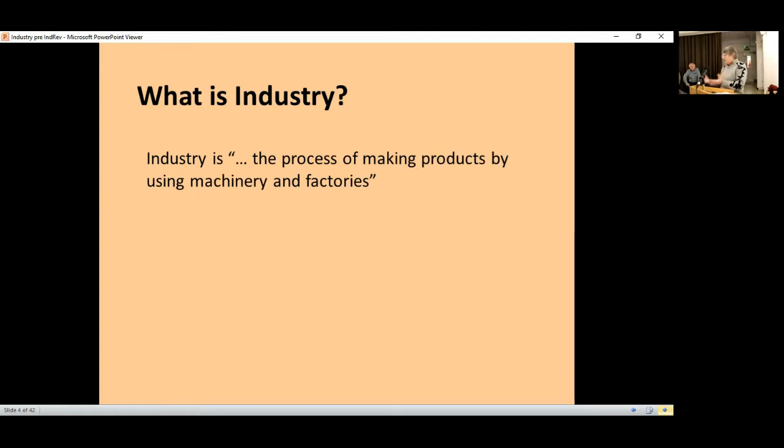So having dealt with the Industrial Revolution, I'm now going to talk to you a little bit about what do we mean by industry. It's using machinery, it's working on a large scale, maybe in a large building. You're not just using manpower, you've got other sources of power. On the scale of working, you're producing lots of identical products. You maybe got many workers there, all doing different stages in a chain of production.

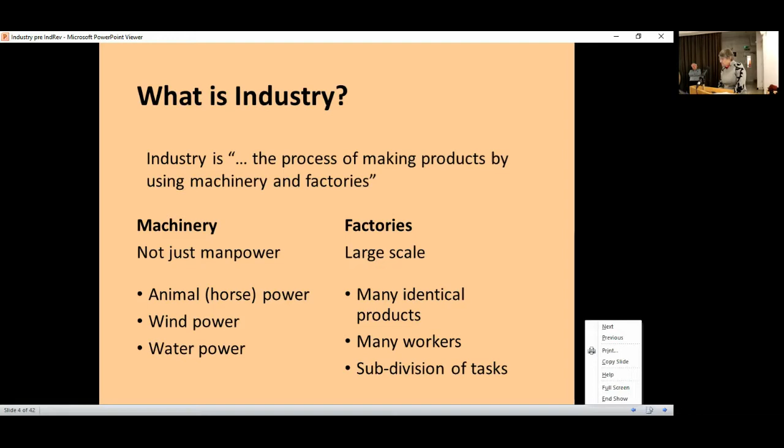And what I'm going to be showing you is really evidence, mostly archaeological evidence, for this happening and starting to happen way back in the Middle Ages rather than at the beginning of the Industrial Revolution. So the sources of evidence I shall be presenting to you are mainly archaeological. They're evidence from excavations of features, the finds that come out of the ground. So you've got evidence about workshops, about furnaces and hearths, raw materials and tools that were being used.

And you'll often find a lot of the waste products, which you can then investigate using scientific techniques to identify what process or processes were being carried on. There are medieval and Renaissance technical treatises, luckily, from my point of view, available in modern translations, translated by people who understand the technology, not just by linguists. And that gives us an extra layer of information we can use to help interpret the archaeological finds. There are some other documents I've listed here, things like wills and guild records, but I've not made much use of those.

This is a very sensitive thing. Go back.

Right, I'm starting off with ironworking, the bloomery process, which is the medieval and prehistoric way of making iron, very small scale.

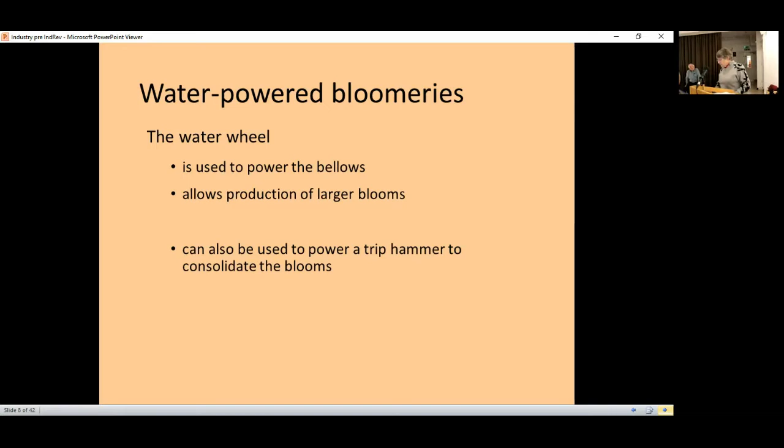A development of the medieval period here, you've got water power coming into play. You can use it to power the bellows, and it allows you to produce larger blooms. You've got a more constant draft. You're increasing the scale of the operation, and the water power, of course, can also drive a trip hammer to consolidate these blooms. And this is old data from back in the 60s that Ronnie Tylecote put together, showing how the sizes of iron blooms increased with time.

You can see along the bottom, you're starting off prehistory, and then you've got a sort of plateau through most of the medieval period. And then suddenly, towards the end, he's detecting much larger blooms being made in the 15th and early 16th century. And this is when water power comes into play in a major sort of way.

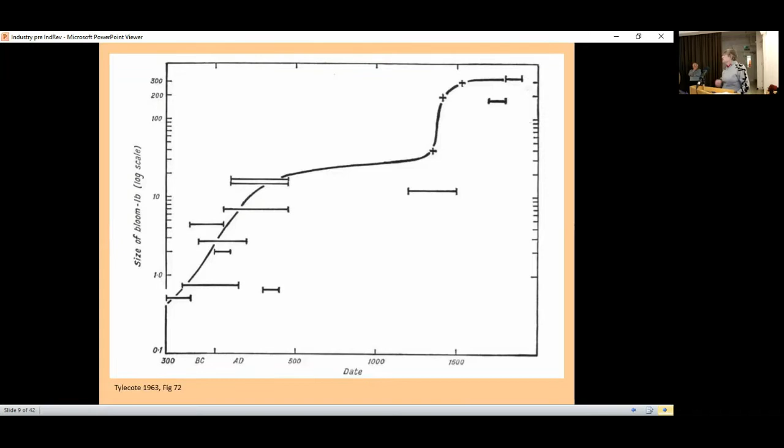Yes, I have a wheel of death here.

Right, so if you've got water power, this is a reconstruction drawing based on archaeological findings at Bordesley Abbey, which is in the West Midlands. And it's an early smithy. It's not water power here being applied to a furnace. It's for the smithy. So once you've got your bloom, you take it out of the furnace, you've then got to consolidate this iron sponge. And so having a hammer, having a large fire, water-powered bellows makes it much easier. You can work on a much larger scale than you otherwise could do.

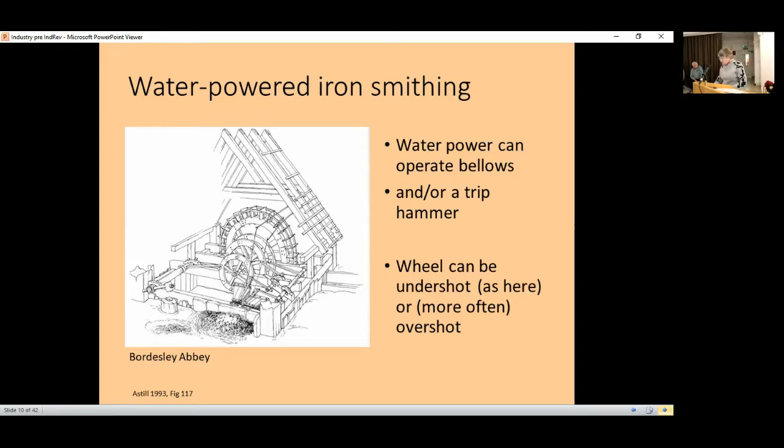It started in the end of the 15th century. This is, as I say, 16th century, and it finished in the early 17th century, but the waterworks went on to blow a blast furnace, which was nearby, built at the end of the 17th century. So this sort of reuse of infrastructure, again, is something that comes in: having built something on an industrial scale, I would argue, it then continues on in use.

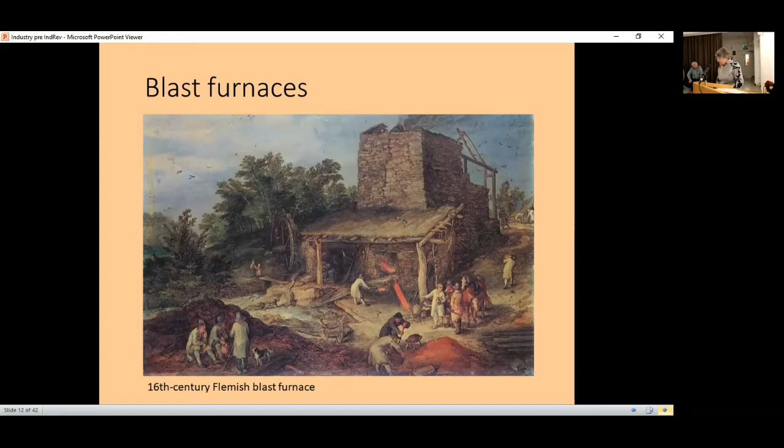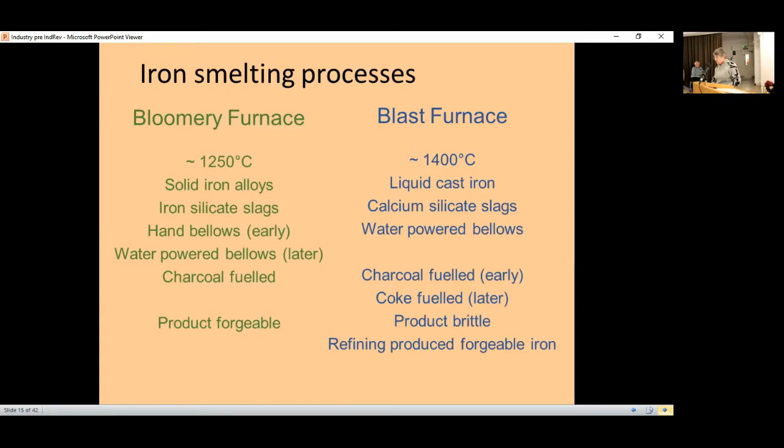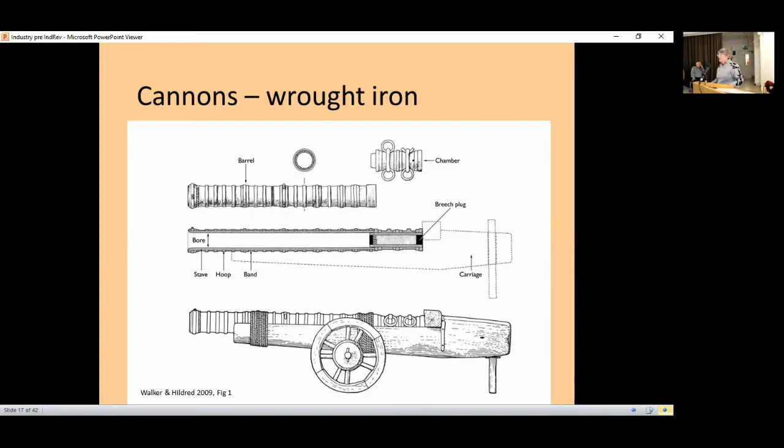And this was the way that you could make a workable piece to fire, but without casting it all in one. And in the middle of the 16th century, you begin to get cast cannon. Seemed to be an English speciality to begin with. The Weald was the place where most of them were made, and really nobody else was having a go at it until the 17th century.

And these pictures show you the cannon from Pippingford, excavation by David Crossley, and it's still got its casting head on. You can see it up at the top end of the cannon. It's never been cleaned up, it's never been used. Why? Because they would have tapped it and found that there were voids, the metal hadn't run and totally filled the mold, and so it was useless. They could have melted it down again, reused the metal, but they didn't do so.

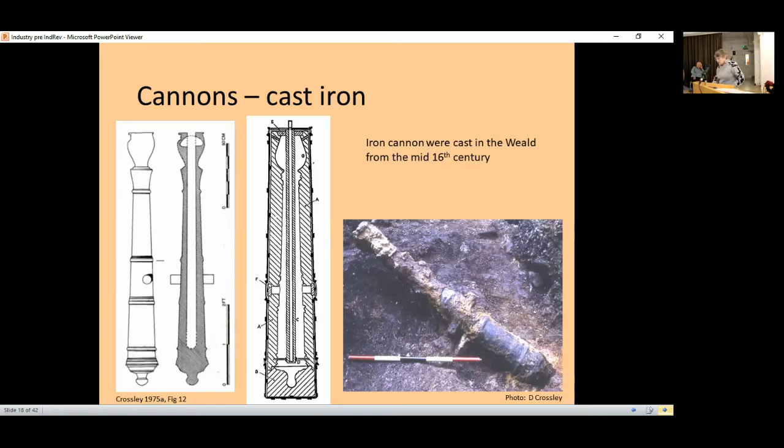So we've got all the stages. We know they were doing it. This isn't just one man and his dog in a smithy having a go. This is iron casting, large scale. And I think it's the beginnings of the technology that then goes on to produce large iron cauldrons and things like that in following centuries.

If we leave iron behind, I've said quite enough about that. Look at lead smelting, and that again is something where you've got changing technologies. You start off in the medieval period with a bole. It's basically a bonfire on a hillside. It's blown by the natural wind. You'll put it somewhere that it'll get a good draft, and you're burning wood, you're reducing the lead, and you're ending up with lead metal, but it's very wasteful. A lot of the metal gets oxidized, you don't retrieve it as metal.

And so you get the ore hearth coming in, a different process, in something like the 16th century. Here you've got bellows blown, either hand bellows or later on water powered. You've got different fuels being used. And it's a rather more efficient process. And then finally in the 17th century, you've got the cupola, reverberatory furnace, and you're getting a different technology completely.

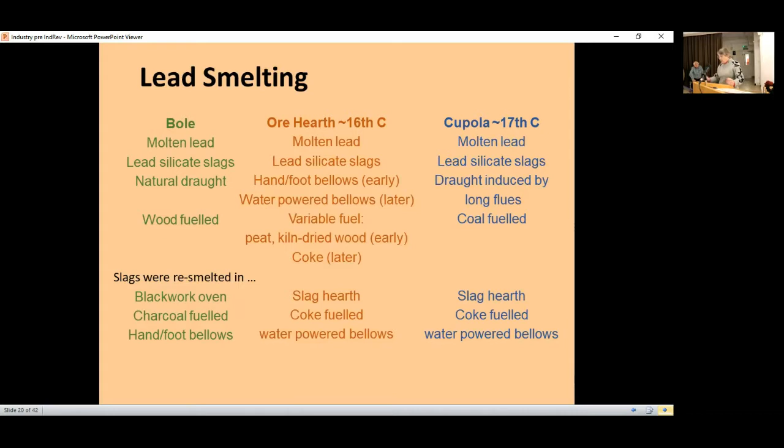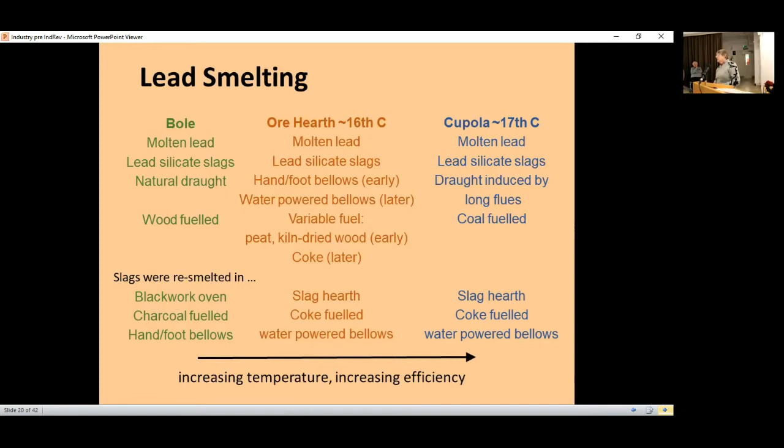And why all these changes? You've got increasing temperatures, but you've got increasing efficiency. You're getting more of the lead that's in the ore out as usable metal. And so it's an economic driver for changing the technology, because you're going to get more of the lead that's in the ore out as usable metal at the end.

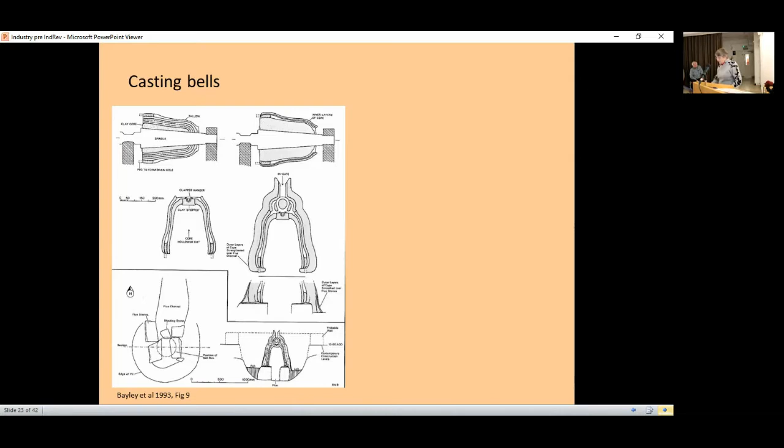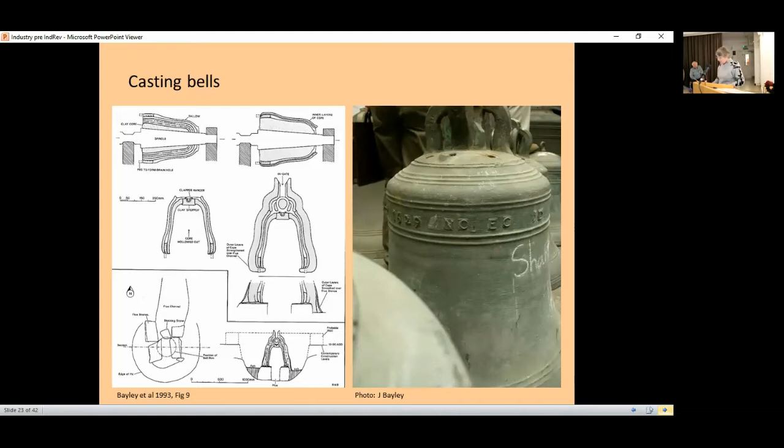If you look at bigger objects, things like bells, this is another case where the technology really doesn't change in centuries. And in fact, if you'd gone and looked at what the Whitechapel Bell Foundry was doing only a few years ago before it closed down, you'd have seen a lot of similarities between this, which is a 10th century bell from Gloucester. Here's a 17th century bell, its shape is somewhat different, but the way it was made and cast is just the same.

And this is how you would have done it. You make your core, you make your cope, the outer part of the mold, you assemble them, bury it in the ground in the bell pit, and then you build a furnace, melt the metal and run it in. And that technology hasn't changed in over 1,000 years. You're making large objects, in a way they're one-offs, but because of the size of the undertaking, you're probably going to have quite a number of different people involved in the preparation of the mold, building the furnace, running it all. And so I think this is a more industrial level of production, even though each product is a one-off.

If we think about wrought metalworking, a lot of that is, again, small scale people fashioning objects, brooches, buckles, decorative knobs you fit on your belts and your clothes. But that's, again, a small scale working that an individual craftsman or his family, or maybe him and an apprentice, would work on their own.

But we have to remember that some classes of objects were actually made in very large quantities, even in the early medieval period. There are thousands and thousands of coins produced. They're still found in large hoards. And so we know the production was enormous, but we still think of it in terms of, here you've got a group of men producing coins.

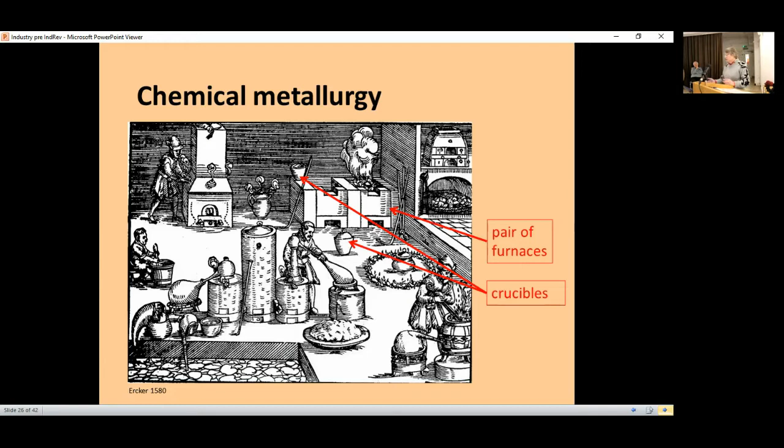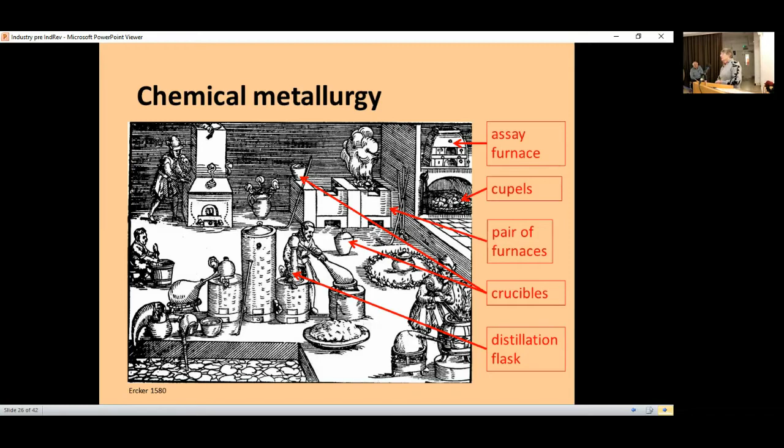This is a drawing from Ercker's textbook, if you like, of the late 16th century. This is what a good workshop should look like. You've got all sorts of things there. You've got at the back a pair of furnaces, some crucibles. Here in the foreground, you've got distillation flasks. They would have been used for making nitric acid. And at the back in the other room, you've got an assay furnace for testing the purity of precious metals.

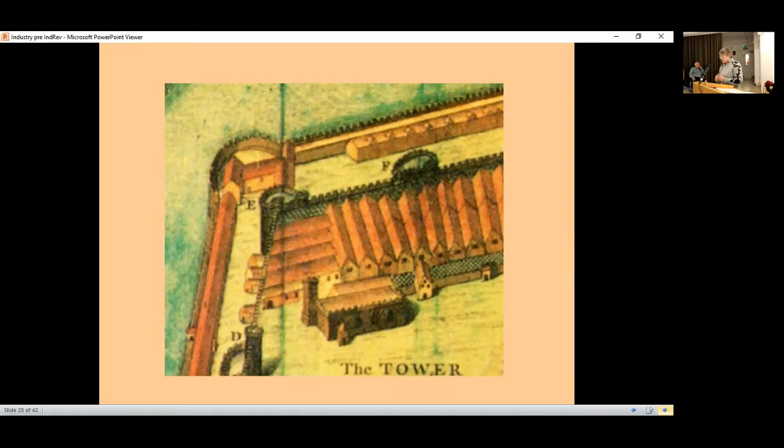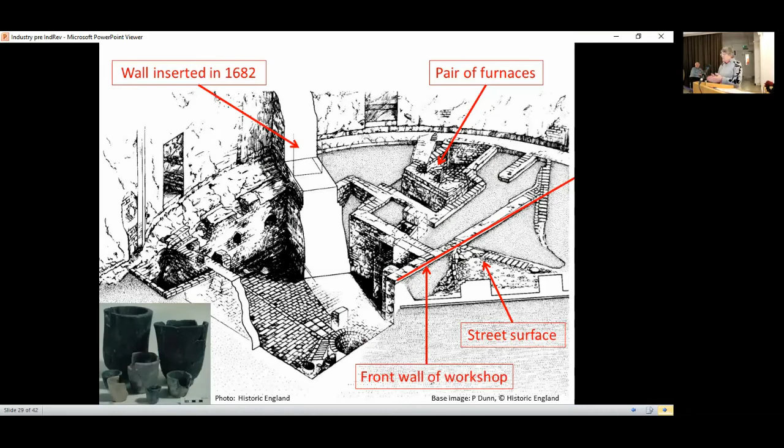So you've got a considerable scale of working here. We've actually got a workshop where various processes have been carried out. But this is the beginning of the 16th century. It's not industrialization. I talked about distilling nitric acid. Why would you want to do that? Well, this was a new technology.

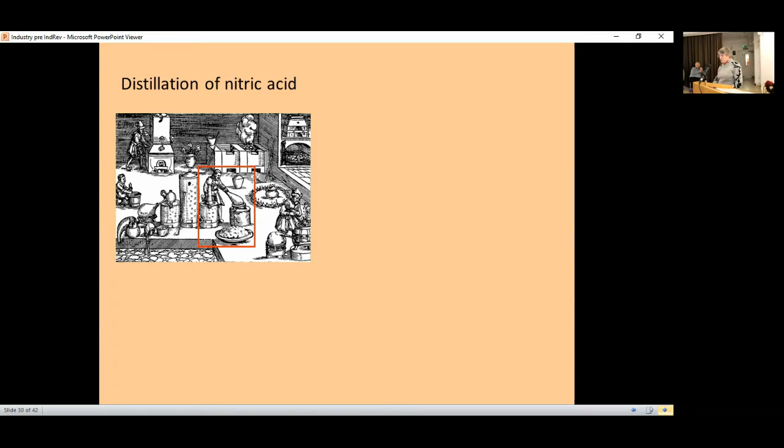Nitric acid you were using for parting. If you've got a mixed gold-silver alloy, there were old methods, which I'll come to in a minute, for separating the two, but much easier was to hammer your metal out fairly thin and dunk it in nitric acid. The nitric acid will dissolve out the silver, it won't affect gold, and so you've separated gold from silver. And this is, you know, a new technology of the 16th century.

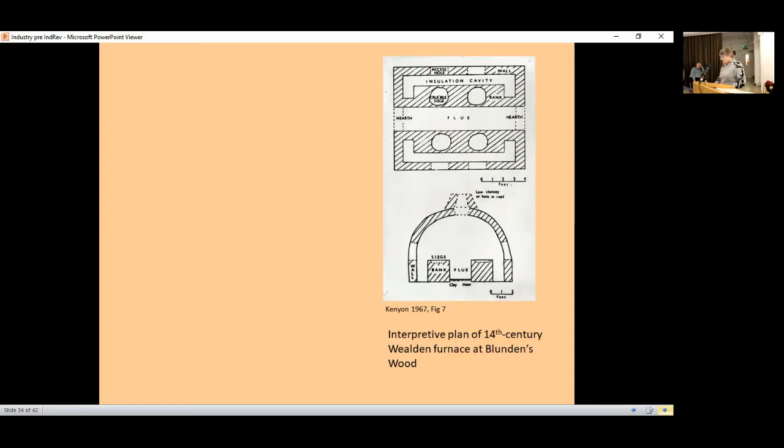You have these long walls, if you like, on either side of a fire trench. You set the fire from both ends. You're burning wood here, not charcoal. You've got pots, open crucibles sitting on these walls, which are described as sieges, and then you will dip molten glass out of them.

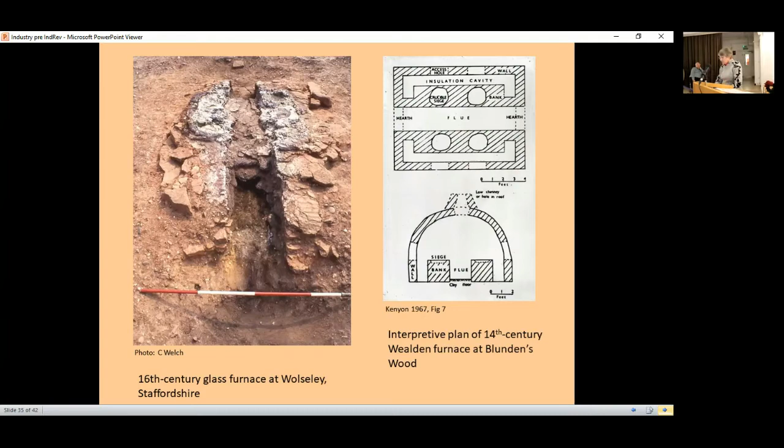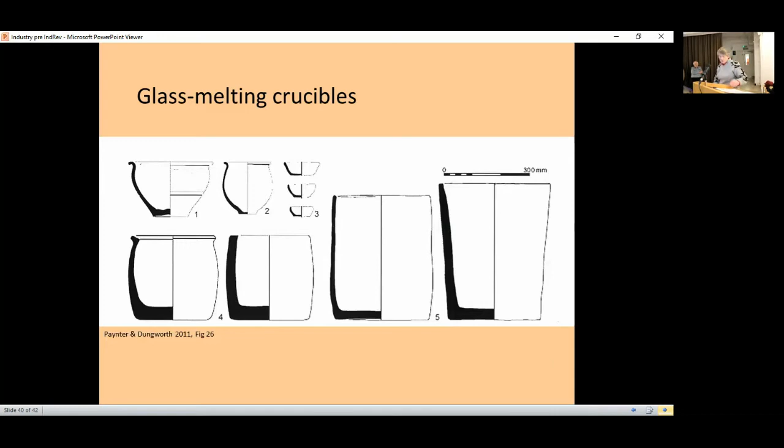So to finish, or maybe nearly finish, I hope I've demonstrated to you that before the Industrial Revolution, at least some of the manufacturing that went on in this country was on an industrial scale. How do you like to define that? I've shown you examples, smelting metal, minting coins, but even in a single trade, there was no one date where everything changed all over the country overnight. The old technologies often continued in more distant areas, areas where the demand for the product was less. You could carry on working in the old way as you always had done.

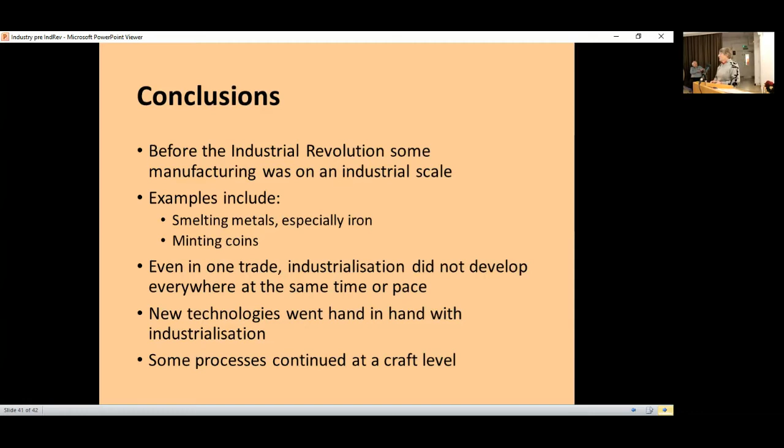You've got new technologies coming in, and often they went hand in hand with a change in scale. So whether it was the technology that drove the industrialization or the desire to industrialize, which meant the adoption of new technologies, I think it's very much a chicken and egg question. But despite all of these changes, some processes still carried on in the way they had done for hundreds of years.

And really, to just reiterate that in different words, this move towards industrialization, towards the beginning of the Industrial Revolution, the scale of production is increasing, the designs of furnaces and hearths are changing, process technologies are responding to economic drivers, you've got beginnings of mechanization, and you've got some new materials and technologies, but the quality of the products didn't always improve with the quantity. And these are all interrelated areas, but I hope you've seen and will believe me when I say industrialization was well on its way before the beginning of the Industrial Revolution.

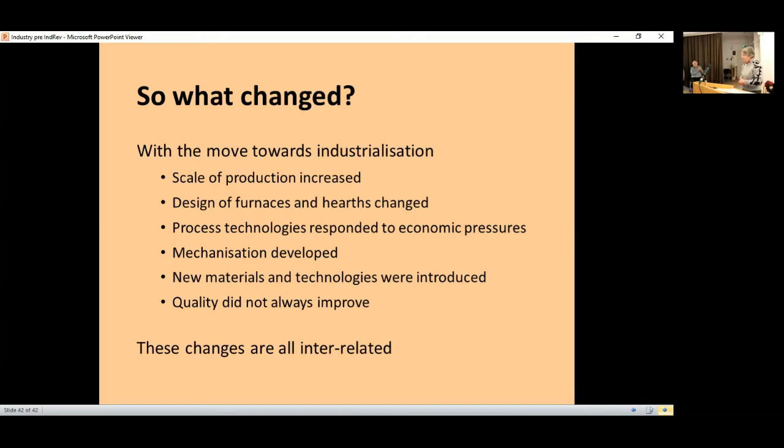Well, thank you very much, Justine. Wonderful, just what I was hoping for.